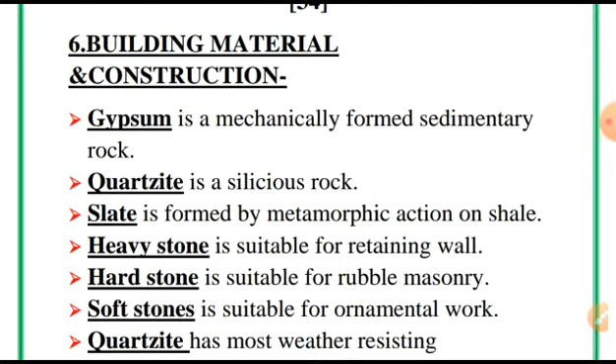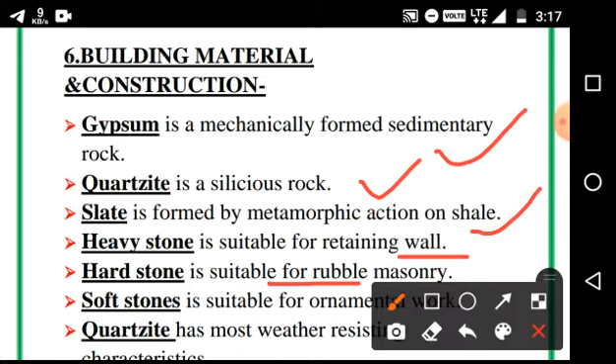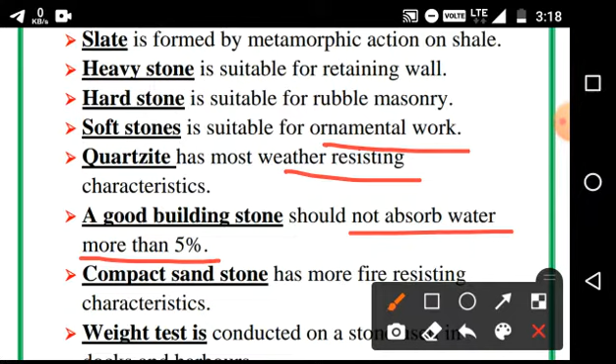Hard stone is suitable for rubble masonry. Soft stone is suitable for ornamental work. Quartzite has the most weathering resistance characteristic. A good building stone should not absorb more than 5%. If it absorbs 10%, it should be rejected. Compacted sandstone has maximum fire resistance capacity.

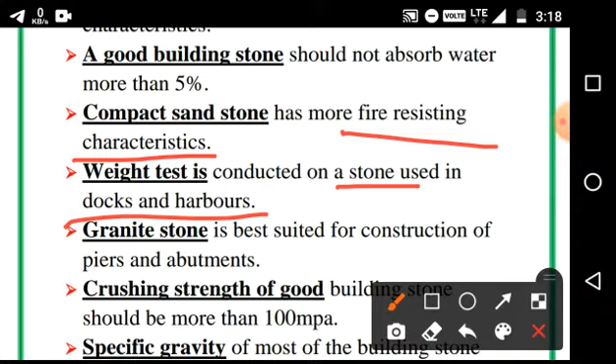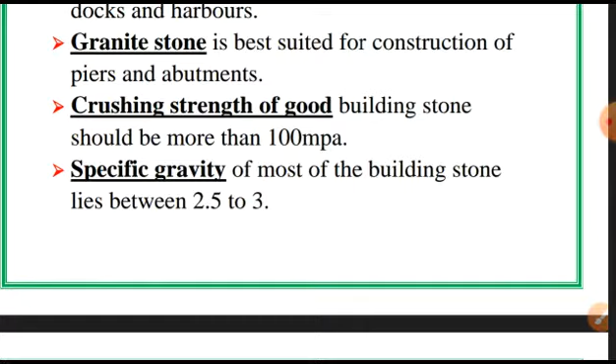Weight test is conducted on stone used in docks and harbors. Granite is best suited for construction of piers and abutments. Crushing strength of stone should be more than 100 MPa. Specific gravity of building stone is 2.5 to 3.

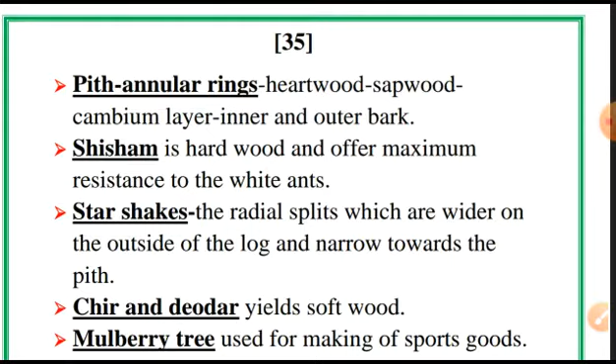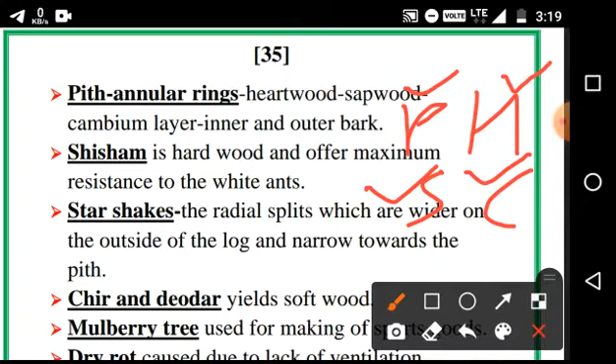Shisham had hardest wood, obtained maximum resistance to white ant, star shake.

Radial split which are wider on the outside of the log, narrow towards the pith.

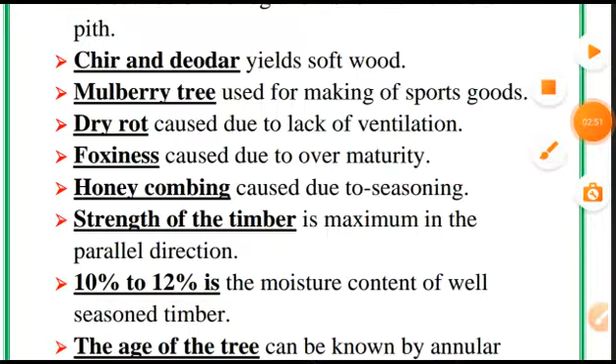Chir and deodar are soft wood. Mulberry tree used for making sports goods. Dry rot caused due to lack of ventilation. Foxiness caused due to over maturity. Honeycombing caused due to seasoning. Strength of timber is maximum parallel to grain, minimum perpendicular to grain.

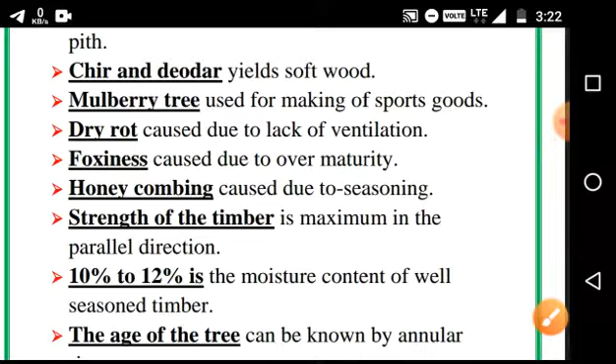10 to 12% moisture content of well seasoned timber. The age of the tree is known by annual ring. First class timber has an average life of more than 10 years.

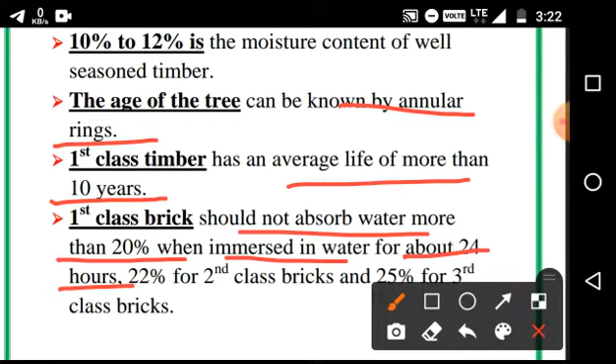First class bricks should not absorb more than 20% when immersed in water for 24 hours, 22% for second class brick, 25% for third class brick. Crushing strength of first class brick should not be less than

10.5 Newton per mm square. For second class brick, 7.5 Newton per mm square. Third class brick, 3.5 Newton per mm square. If brick is used in construction, minimum crushing strength should be 5.5 Newton per mm square.

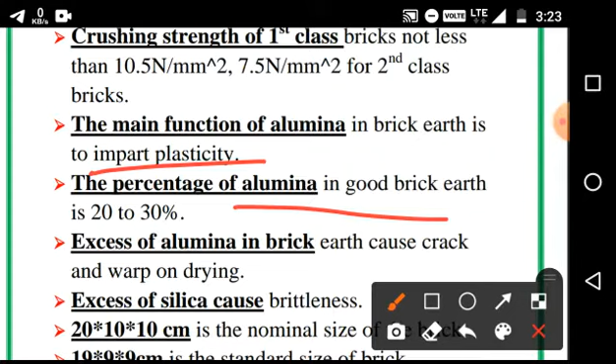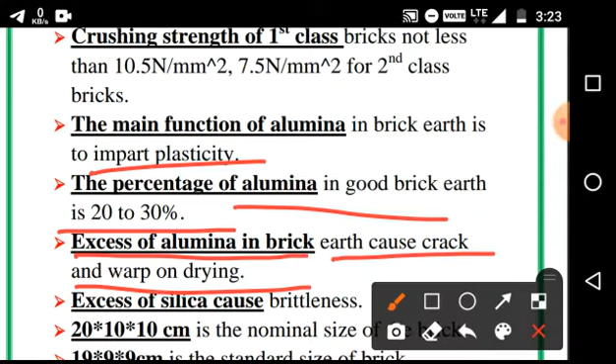The main function of alumina in brick is to impart plasticity. Percentage of alumina in brick is 20 to 30%. Excess of alumina in brick causes cracks and warping on drying. Excess of silica causes brittleness.

Nominal size of brick is 20 by 10 by 10 centimeter. Standard size of brick is 19 by 9 by 9 centimeter. Silica in good brick earth is 50 to 60%. Silica makes the brick retain its shape. Kneading is the process of mixing clay and other ingredients.

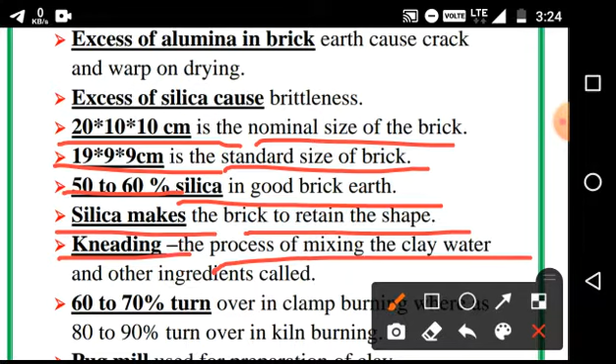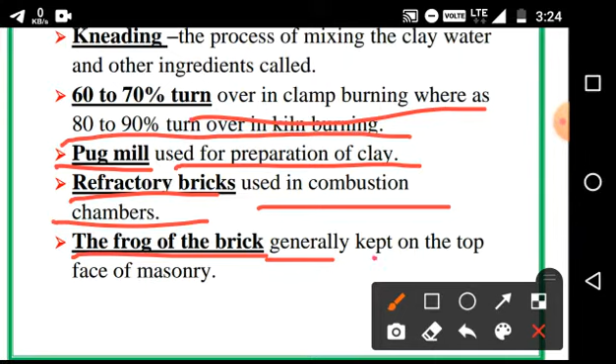60 to 70% turn out in clamp burning, as 80 to 90% turn out in kiln burning. Pug mill used for preparation of clay. Refractory brick used in combustion chamber. The frog of the brick is generally kept at the top of masonry.

500 bricks required for 1 meter cube of brick masonry.

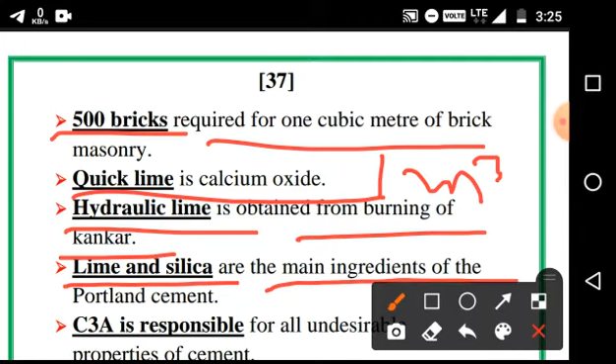Quicklime is calcium oxide. Hydraulic lime is obtained by burning of kankar. Lime and silica are the main ingredients in Portland cement. C3A is responsible for all undesirable properties.

Le Chatelier apparatus used for testing soundness. Vicat apparatus used for testing setting time of cement.

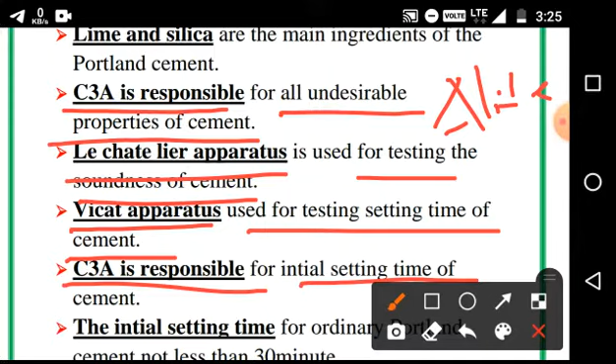C3A is responsible for initial setting time. Initial setting time of ordinary Portland cement (OPC) should not be less than 30 minutes. Initial setting time should be... final setting time should be 10 hours.

Initial setting time for OPC ordinary Portland cement should not be less than 30 minutes. Final setting time of OPC should not be more than 10 hours.

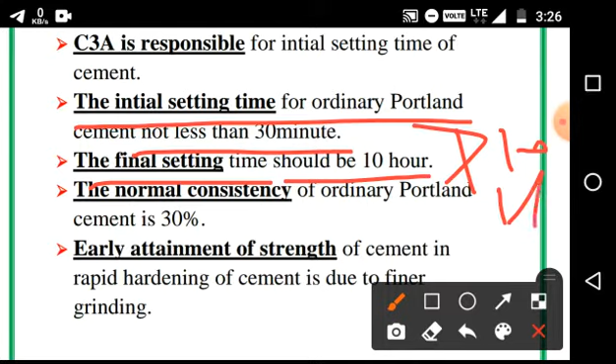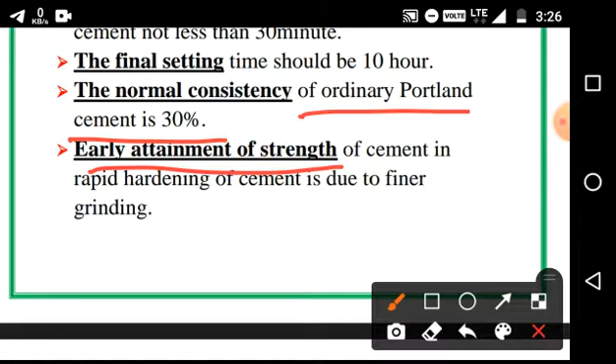The normal consistency of ordinary Portland cement is 30%. Early attainment of strength of cement in rapid hardening cement is due to finer grinding. After storage, the strength of cement decreases. Addition of pozzolana to ordinary Portland cement causes shrinkage.

Gypsum consists of CaSO4 and H2O. Plaster of Paris is CaSO4 half H2O, that is calcium sulfate hemihydrate dot H2O.

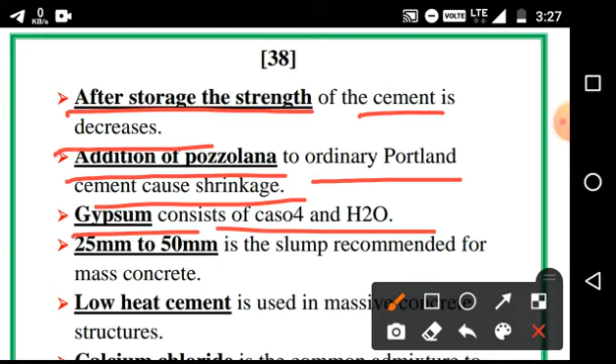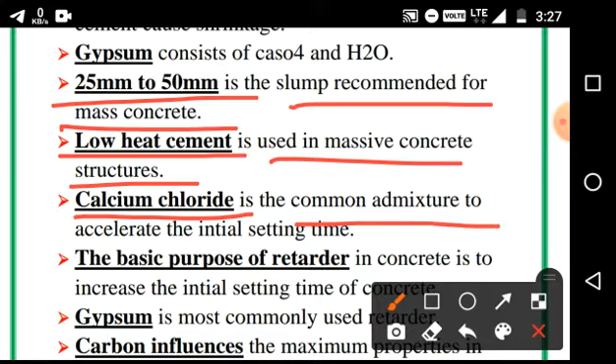25 mm to 50 mm is the slump recommended for mass concrete. Low heat cement is used in massive construction. Calcium chloride, a common admixture, accelerates the initial setting time. The basic purpose of retarder in concrete is to increase the initial setting time. Gypsum is most commonly used as retarder.

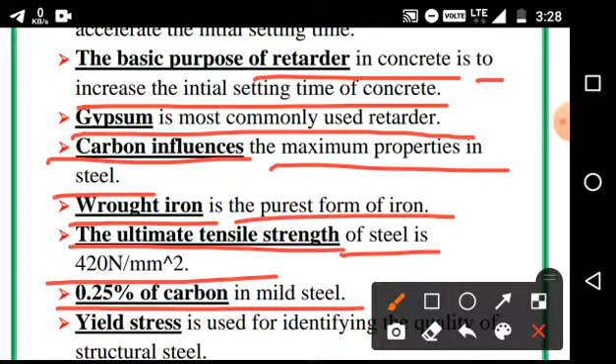Carbon influences maximum properties in steel. Wrought iron is the purest form of iron. Ultimate tensile strength of steel is 420 Newton per mm square. 0.25% carbon content in mild steel. Yield stress is used for identifying the quality of structural steel.

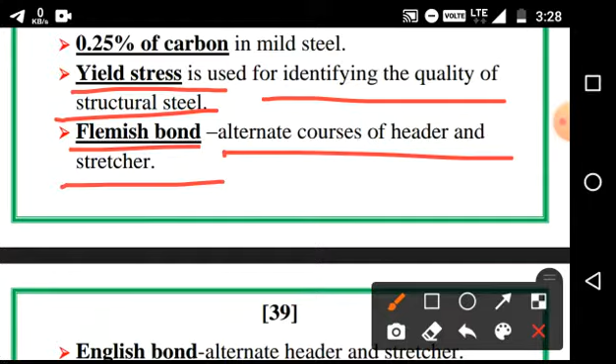Flemish bond has alternate courses of header and stretcher. English bond has alternate header and stretcher in the same course. English bond can carry heavier load than Flemish bond.

Pressure acting on the stone in stone masonry should be perpendicular to the direction of bedding plane. Queen closer is formed by cutting a brick into two equal parts lengthwise. English bond is provided in masonry for carrying heavy load.

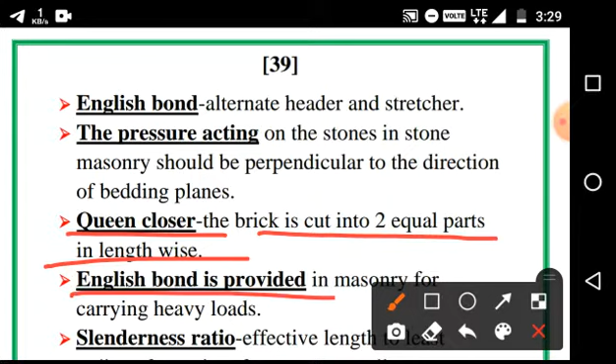Slenderness ratio is the effective length by least radius of gyration, for masonry wall not more than 20. The differential settlement in case of sandy soil should not be more than 25. In case of foundation on black cotton soil, the most suitable method is to replace the poor soil.

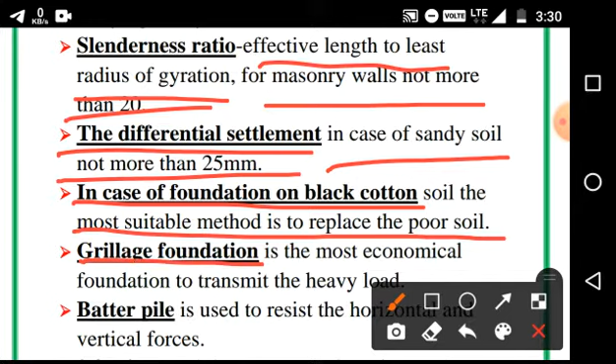Grillage foundation is the most economical foundation to transmit heavy load. Batter pile used to resist horizontal and vertical forces. 0.9 meter is the minimum depth of foundation for clay soil. Bearing capacity of waterlogged soil can be improved by draining the soil.